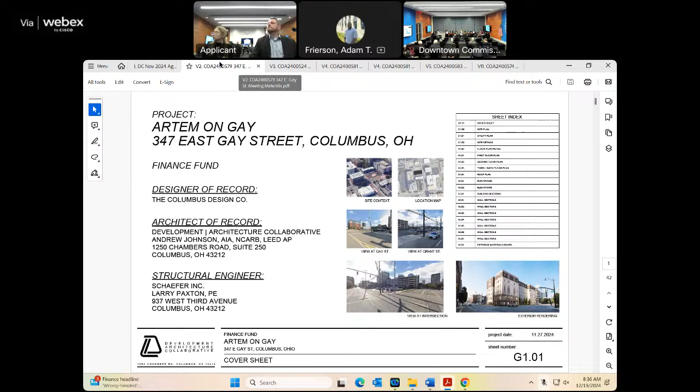The submitted materials include a site plan, utility plan, site details, floor plan, roof plan, elevations, sections, building details, renderings, material details, and material cut sheets. We can go through those materials quickly.

Just the site plan. We have some building details here, the wall types. Here is the ground floor. You see those amenity spaces here with the parking access off of Grant. Second floor plan. You can see one of the terraces here. 3rd through 6th floor. Here's the roof plan. And then we have our elevations, sections, wall sections. We have the materials board. And then we have the material cut sheets if you have any questions about the specific materials.

With that, the downtown design guidelines recommend that buildings located on a corner lot be designed to address both streets, utilize high quality materials and a higher level of design with a transparent first floor and landscaping that complements the overall development. They also state that parking structures have a high level of design to minimize their monotony, integrate other ground floor uses, and that a reduction or elimination of curb cuts is encouraged as sites are redeveloped. Based on the information provided, this project would trigger downtown streetscape standards along the Gay Street frontage. In summary, the proposal is largely consistent with the downtown design guidelines, and staff encourages the applicant to add an art mural on the west elevation.

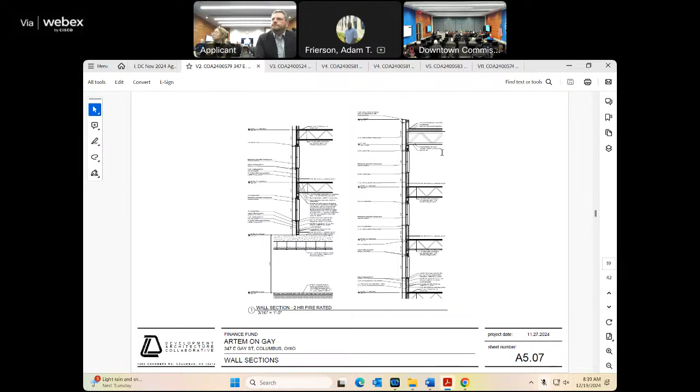So the bottom, the original, I guess the back of the building that faces an existing parking lot to the south, was going to be cast stone. What we're doing is matching what we're doing on the cast stone on the front. Previously it was a veneer, now we're going to go full depth cast stone, full depth brick. The CMU on the back will be a split face CMU that matches the cast stone, same color. So the sample you're seeing right here is the actual cast stone we'll use, and then we'll use a CMU block in the back that matches that as well.

That's first and second floors, actually. Correct. On the back side of the building, since the first floor is all concrete, we have infill walls between the concrete structure, and that infill is going to look similar to this. Once you get above the first floor podium, we transition to brick, and above the brick, we transition to horizontal siding. Around the top of the building, you have the vertical siding. So the horizontal siding is the cementitious shiplap, and at the top we have the vertical metal siding, which are both consistent. Could you show the colors?

Yeah, sample for that, please. This is the brick - obviously this is just showing it as a sample, so not full depth, but that's the brick itself. So for the metal siding, this is actually what the profile looks like. That is not the color, but that's the size of the actual siding. And then this is a sample of the actual color.

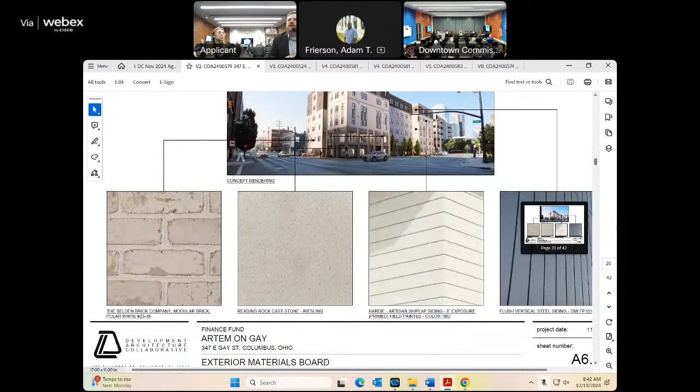I can't remember, but Forgen I believe is the manufacturer that the original architect specified. Do we have a sample of that? I feel like they may have submitted, but I don't know if we got a submittal for the actual punched windows or if we just submitted the others.

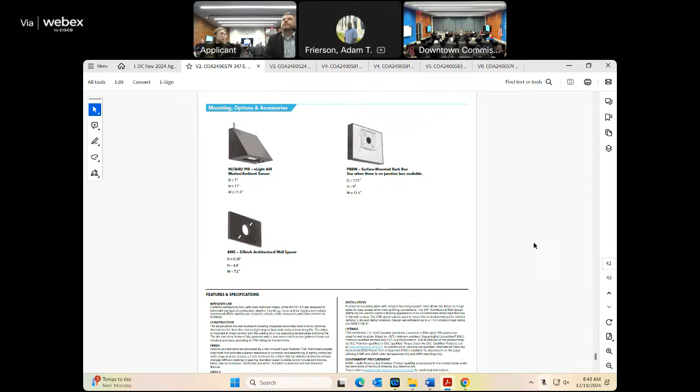Here's the railings. Are they aluminum? Are they vinyl? Yeah, I believe they are. No, sorry. Yeah, I think they're either vinyl or fiberglass. I think they were fiberglass, I believe. It should be mentioned on the section. I apologize, it's either vinyl or fiberglass.

But the look is integral muntins like that. It's a double hung window. It should call out exactly what it says on there.

What's that, smaller than before? Windows are the same size, but what we did was the previous architect had like 3 windows sort of stacked on top of each other - a small little window and then a double hung, and I believe there may have even been a third window in some locations. So we eliminated that; the manufacturer can't really stack them.

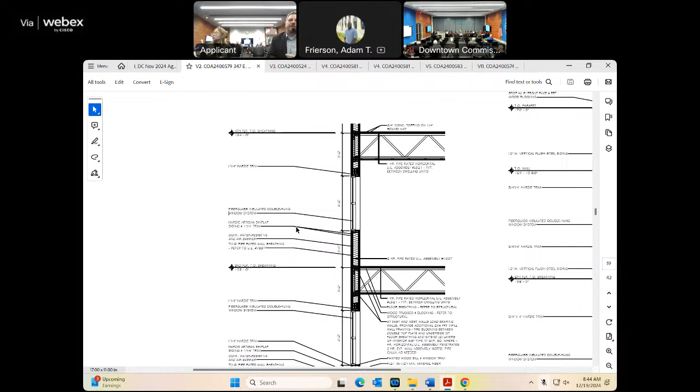They could put them horizontally next to each other, but there wasn't really a way for them to stack them. So we kept the same look, we just removed a lot of the windows. We didn't think it was absolutely necessary to have 3 windows stacked on top of each other for every residence, so in some areas we reduced those, but the overall size of the main window is the same.

So you have the same size of windows? Correct, you just have less. You eliminated panes - exactly, like transoms and the windows below the operable windows. Are they actually smaller in size, or did you just put 3 and turn it? No, so what was the middle one - there was a transom and then there was a lower one. We basically took out the two, the one on top and the one on bottom, and kept the middle.

Is the opening dimension smaller? No, not the middle - the overall middle window is the same, but you don't get 3 windows now, you get 1 and it's the size of what the previous middle window was. We didn't change that, but overall you're getting less daylight in the units because of the reduction of windows. That was really the only change.

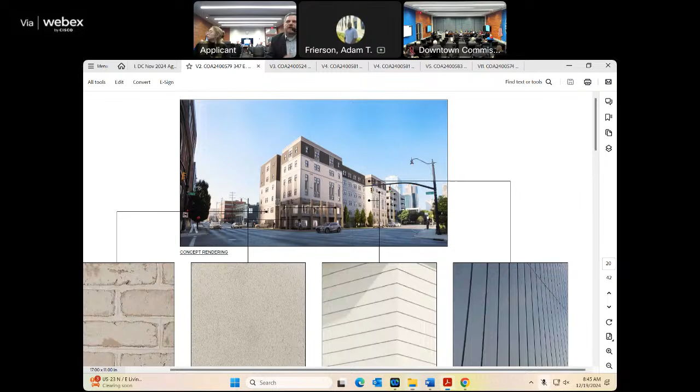So if you looked at the previous elevation and compared it to this, that's basically what we did to the windows. But we kept the same manufacturer, same style of window - we didn't change those. We just reduced the number of windows in the unit that were stacked on top of one another.

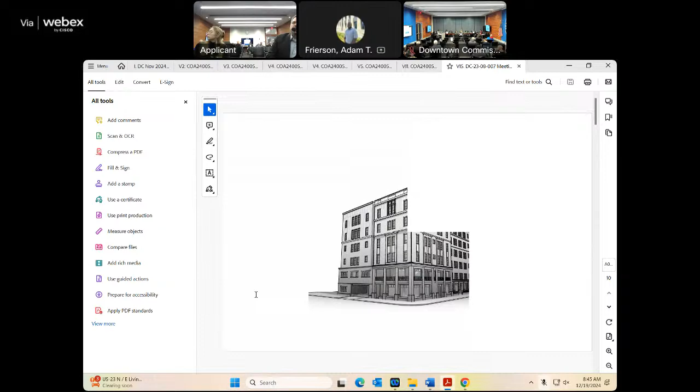Did that happen on all of the windows or just some? No, just where we had multiple windows stacked. I think originally there were 3 - oh I see, yeah, you can see. And I think on that east elevation where they had 3 windows in the middle above the garage, we reduced that to 2.

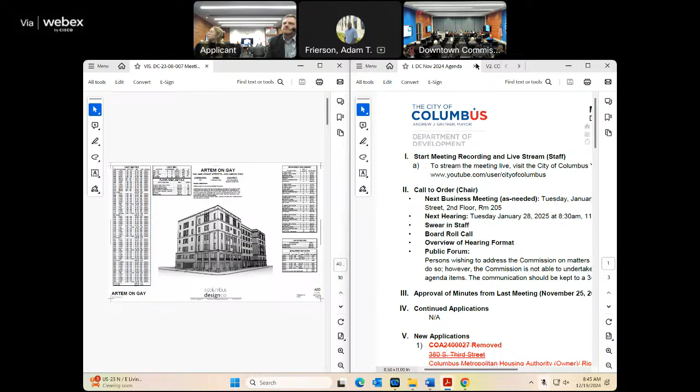Okay, walk us around the east, north, and west elevations please. Sure. On the north side, which faces Gay Street, there are some outdoor amenity spaces, plantings, and the streetscape. The civil team is working with the downtown design standards to make sure everything is in adherence, so they've designed that to meet those guidelines.

There are some plantings. Because it's a LIHTC project, the OFA funding and design guidelines require outdoor amenity spaces, and some of those have to be covered areas - up to 50% of those have to be covered, which is why you're seeing that terrace on the second floor.

On the north elevation, it actually wraps around the northeast corner - there's an outdoor terrace accessed through a community space or office space upstairs on the second floor. On the back side, we also have a terrace that's uncovered. In order to meet that requirement from OFA, we had to provide covered outdoor amenity space for people in the dwelling units or leasing the spaces in the dwelling units.

And then as we turn the corner... This was a particular feature when it was first presented. Could you speak a little bit more, not just with OFA, but to the design and how it contributes to the opportunity for this project?

Yeah, sure. So obviously the developer we're working with, Finance Fund, is requesting 9% LIHTC funding on the project. The design guidelines that OFA has in place, we work with what's required there, but we also have to meet what's required for the downtown commission. The original architect came up with the massing that you guys were comfortable with, so we're kind of working through those types of things.

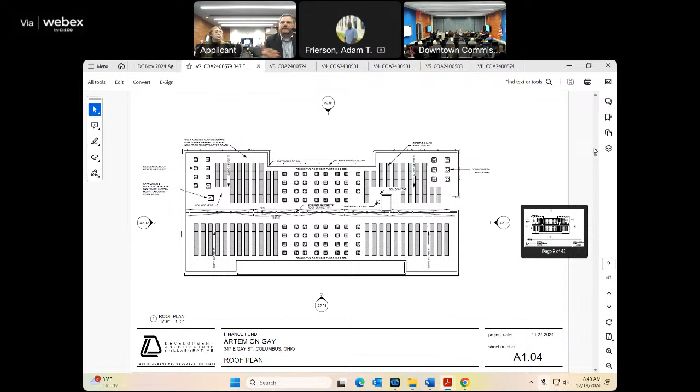We've got bike racks up front, it's walkable, there are places to pick up buses. We've got a couple of public parking spots. There's also a community space on the corner for people outside to come in and collaborate with the people in the building.

We also have the private parking. In terms of parking, the downtown area doesn't require off-street parking, so what we did was provide a van accessible parking space inside the parking garage as well as a standard parking space. Those two parking spaces meet the City of Columbus design standards, with access aisles on both sides.

When it was initially submitted, in order to provide an accessible parking space for the accessible units in the building, we provided one for each accessible unit, which was more than we really needed. So we have a total of 8 parking spaces, 2 of which meet the City of Columbus design standards. The others meet the ICC A117.1 standard, which is an 8-foot parking space and a 5-foot access aisle. Since the City of Columbus doesn't require off-street parking, we gave more than we needed.

But we couldn't reduce the number of accessible parking spaces because when it was originally submitted to OFA as part of the 20% or 30% submission, we showed 8 spaces. The owner tried to get a reduction in those accessible parking spaces, but they said no—though you could potentially designate them as tenant use during certain hours and standard parking during others. We may or may not do that; most likely we'll just label them all as accessible parking spaces as currently shown.

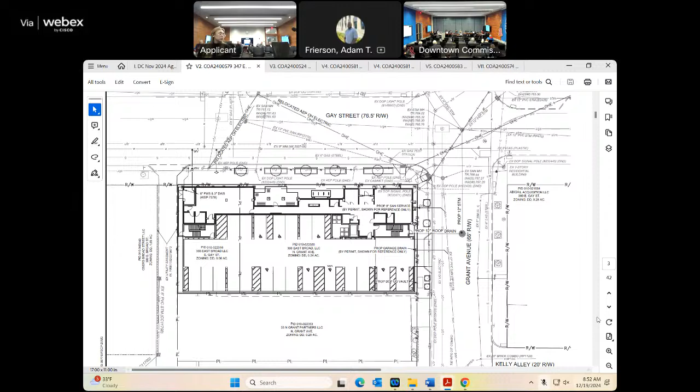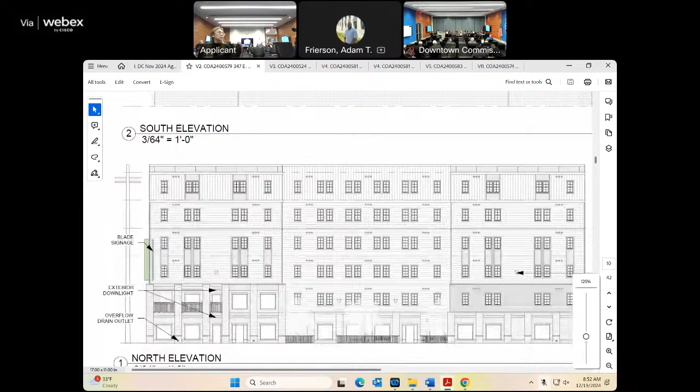So again, the north side at the bottom of the building is this cast stone here. That goes up to, I think, 30 inches. And then above that we have brick, which is this guy here, obviously full depth brick. Then you have the horizontal siding, which is the cementitious, and that's basically from the 3rd to the 4th floor. Actually, on the north elevation, it's 3rd through 5th floor.

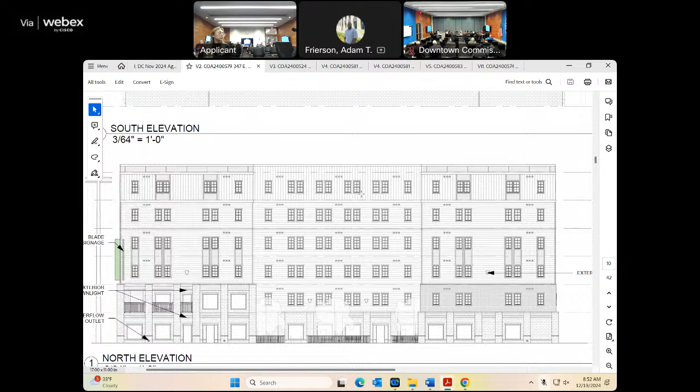And then we transition to the vertical siding, which is this product here. This is the color, this is the profile. It's a 1-foot piece, and these are repeated, obviously. Those were consistent with what the original architect did. The only changes we made were going full depth to this versus a veneer, which is a thinner material, so we had to beef up the structure to accommodate that. But the overall aesthetic for the materiality remained consistent with what it was when initially submitted. As you turn the corner towards Grant, those same materials carry around the side.

And then as we get closer to the garage, we have the split face CMU on the first floor, which are all infill walls between the concrete structure. Then we transition to brick, and again the same transitions to the horizontal siding and the vertical siding up at the top.

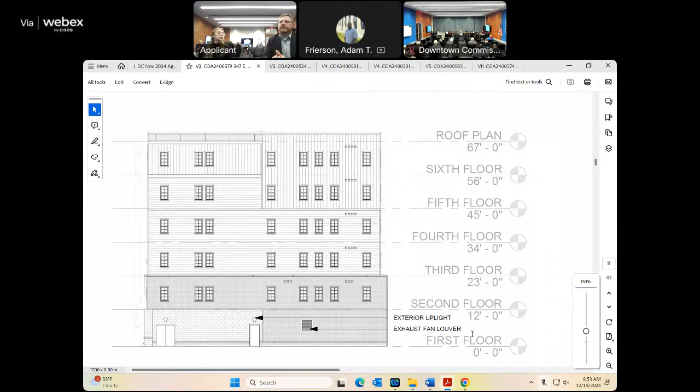The back is very consistent. Again, the east side, the upper 2 floors are vertical siding, horizontal siding from the 3rd to the 5th floor again, and then brick at the lower portions.

Brick—so the area around the entry to the garage is in brick. Is that what that is there? It is, yeah, that is brick. It only transitions to CMU, I believe, at the back side of the building where we infill between the concrete columns, right there with the column.

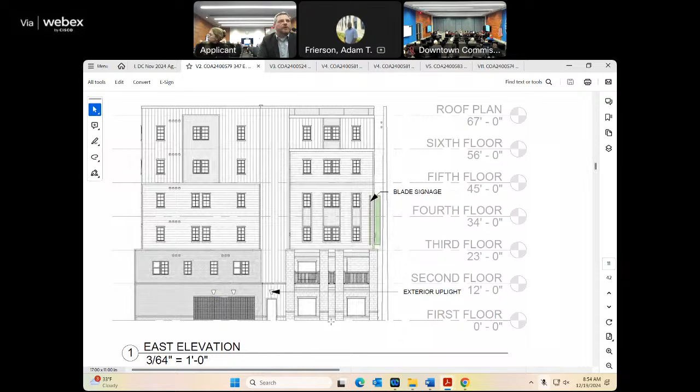That's the CMU product—no, yeah, that is actually the cast stone. So all of those column wraps, all of the pilasters, things like that, are all going to be the cast stone, so it'll be a little bit bigger module, closer to 8x16 than a standard brick size.

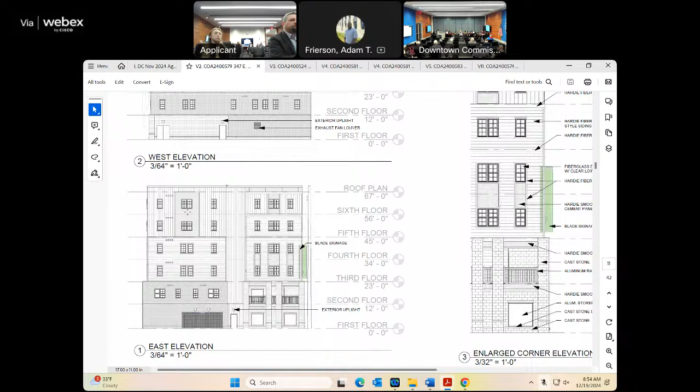I'm sorry, I'm not trying to monopolize. Any other questions? Yeah, what's the material around the windows on the upper floor? Cementitious trim, so it would be the same sort of Hardie panel. They make a dimensional, like a 1x4 primed material that's cementitious, and then it just gets painted.

Out into, there's a door space with windows in it—this area. Yeah, oh, that's all the cementitious panel, this stuff right here, so you can kind of see the joints in it. It comes in like a 4x8 sheet or a 5x10 sheet, and it's basically cut to whatever dimensions we need. Then there are trim profiles you can put in between it that give it a reveal that looks nice. So the mass of the wall is the metal paneling, and inside these rectangular areas, that's the...

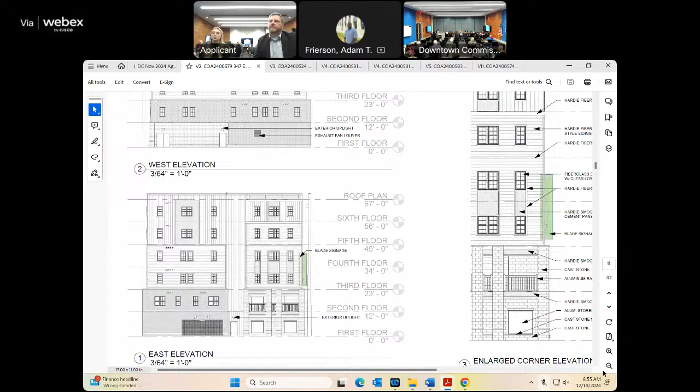You got it, yeah, and then it's trimmed out with cementitious trim like that. You got it. Jim, since we're looking at that elevation, it looks like on portions of the east elevation and some of the other elevations, you bring down the vertical metal siding 2 levels instead of the 1 that you have. I was just wondering if you could explain that design.

Yeah, since we knew there was an initial approval, the initial design submitted by the previous architect was sort of consistent, we didn't change a lot of that massing or the materiality. So we didn't really say let's bring down 2 stories here—it's really consistent with what the original architect did. Like I said, we made some changes to the windows and some other minor changes, but in terms of how far we're bringing materials down, that remained consistent.

I don't know why he originally had it bringing down 2 stories at the back. I mean, we could make some changes to that if you guys feel that would be a more positive change to the building. As we kind of step down towards the back of the building, we make a little bit of transitional changes just for interest as you're transitioning to an area that's sort of facing the parking lot. Maybe that's why they did it.

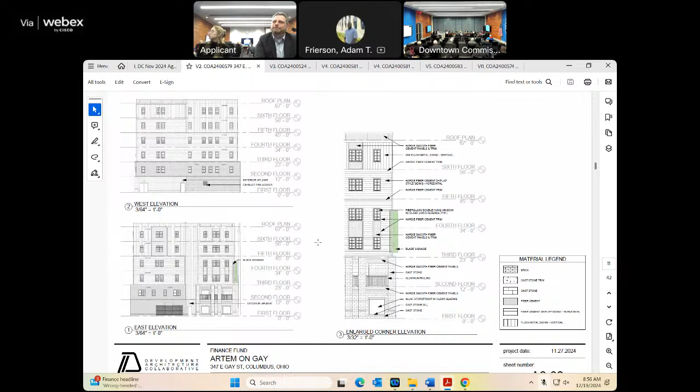Can we see that south elevation again? When you say the back, you mean the south? Yeah, the south one that faces an existing parking lot that will remain, correct.

I think you've given up something here by having all these windows exactly the same. I think it had that little bit of modulation in there on some of those, even if they're not three sections, eliminating three sections. I get that. But I'm wondering if there was an opportunity to lower at least maybe the double ones or something like this so it gives it a little more energy. Yeah, we could go back and take a look at where there were stacked units and potentially put some of those back in.

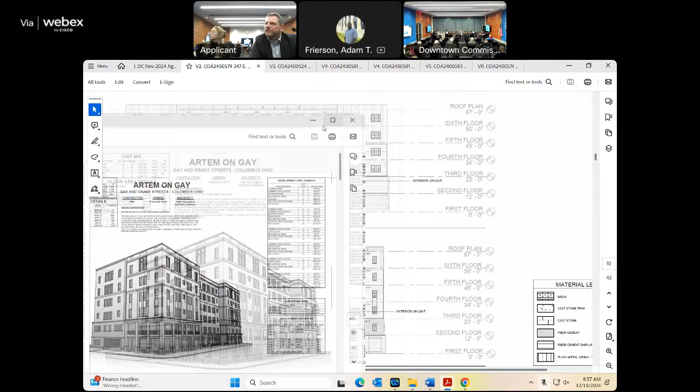So the initial rendering should show it. I think you're seeing some of them up at the top of the building there. You can kind of see it on that east elevation, where there's three windows stacked on top of one another. Those are the kinds of changes that I was talking about.

And I'm not sure that you would need all of that. It seemed like a lot of windows in one unit. That's kind of why we reduced it. If you had a window like this and then next to it a window like this - a little bit bigger window, like a single unit - which means lower, probably. You don't want it.

But maybe just something that's a different size. Three sizes to one. I think you would get something out of that. Yeah, we could take a look at that.

Absolutely. Circling on the 6-story building, that shiplap siding - is it like a residential scale material? I mean, they have different sizes. I believe the one that he picked was a 9-inch reveal. That was, again, the original designer's intent was to use a shiplap type siding. It is residential, a lot of times it's used on residential buildings, but it gives you a little bit of interest. There are other siding type options, but doing something cementitious is going to be the most low maintenance for the future. So I think that's kind of why he selected that.

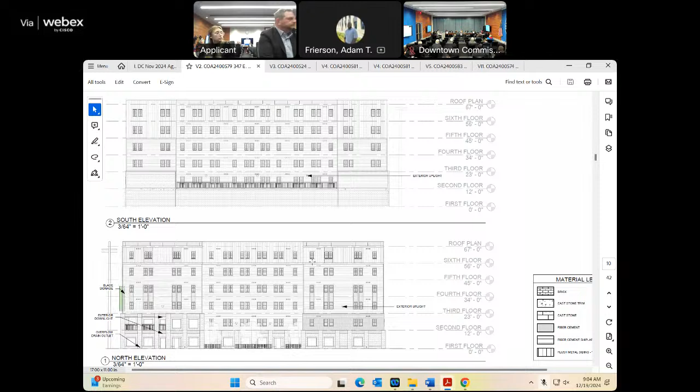Yeah, I agree. I think the big thing for me - obviously the windows are huge - the other thing for me was the railings. They all seem like they have that very commercial sort of feeling to them, institutional almost. So I think having more of a residential type of railing, maybe with lighter elements, something that sort of lightens that up and doesn't make it feel so institutional.

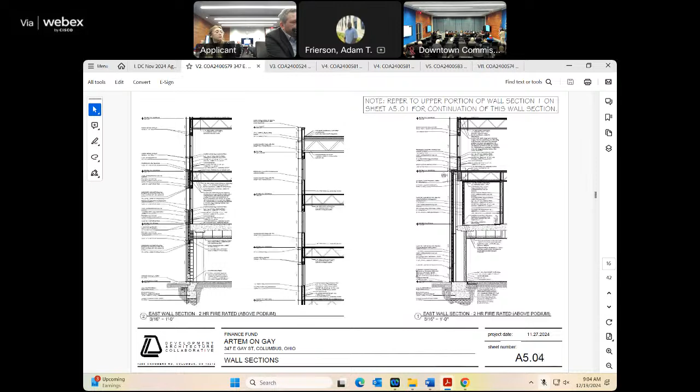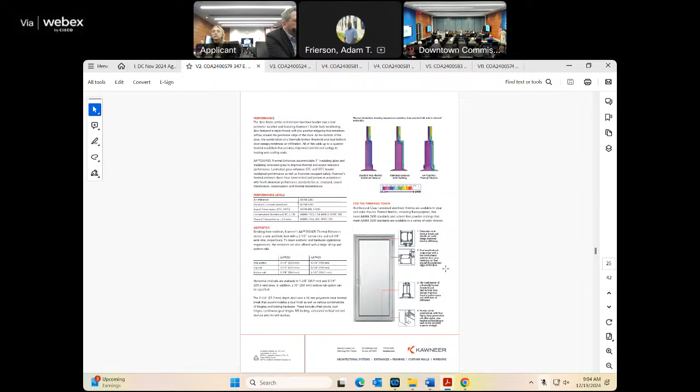Sure. Where is everybody on this thing? Let's almost view this a little bit as conceptual and say, what would we like to see? Because I think what we want to do, to the extent that we can, is - I know you guys in the large sense have been working on this for quite a while - so where's everybody on this?

I think we're talking about some of these detail tweaks. I think it's a great project that just needs a little more finesse, without blowing the budget.

Obviously we're working with the developer here and we get VE requests, but we're trying to do the best we can to make sure we're meeting the guidelines and all that. So I'll work with them and say, look, we've got to make some of these tweaks, we're not going to get approved if we don't. We'll do the best we can, resubmit it, make those changes, send it back to you guys and get back on the agenda.

I'm kind of looking at your elevation drawings here too, and there's some dark patches in there, like around the base and at the top. I think that's good. We discussed the palette, and it's real light. I think if some of these elements are a little darker, to me it just adds a little kind of mass to the thing.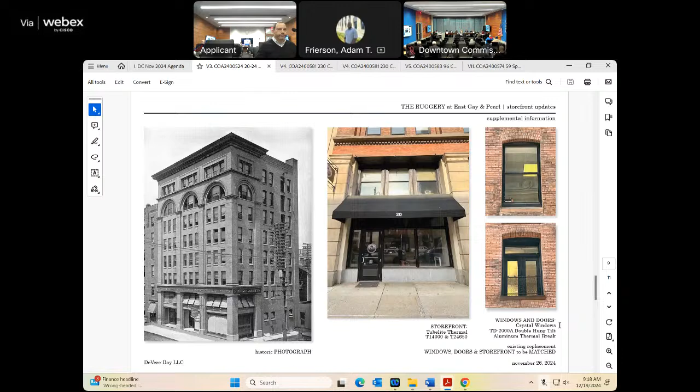This is located at the corner of Cleveland Avenue and Spring Street on what is currently a surface parking lot of the Columbus State Community College campus. The applicant is seeking commission approval to construct a new 80,000 square foot health sciences building situated on a portion of the current parking lot. The site includes landscaping and outdoor seating areas, and exterior materials include metal panels, base brick, and curtain wall. Submitted materials today include existing condition site plan and photos, site plans, parking lot, pole lighting details, landscape plan, floor plans, roof plan, elevations, renderings, section, building details, and material cut sheets.

The downtown design guidelines state that downtown's built environment should continue to be enhanced and energized with new buildings and additions to existing structures that promote good design, long-lasting building construction and materials, and attention to detail, especially at the street level. The guidelines recommend that new construction be influenced by the pattern of nearby contributing buildings. They also recommend high-quality materials, ground floor transparency, lighting that minimizes uplighting, and the inclusion of landscaping and plaza space. The proposal is consistent with the downtown design guidelines.

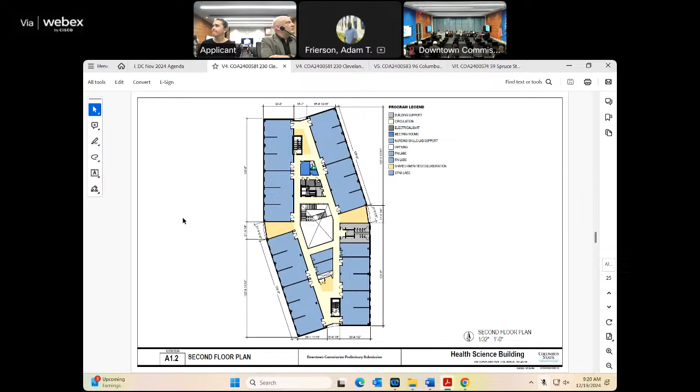Some rendering imagery. We have the landscaping plan, and here's the planning diagram for the building. Architectural site plan, and then we get into the floor plans for the building: the first floor, second floor, third floor, and then the roof plan was provided as well.

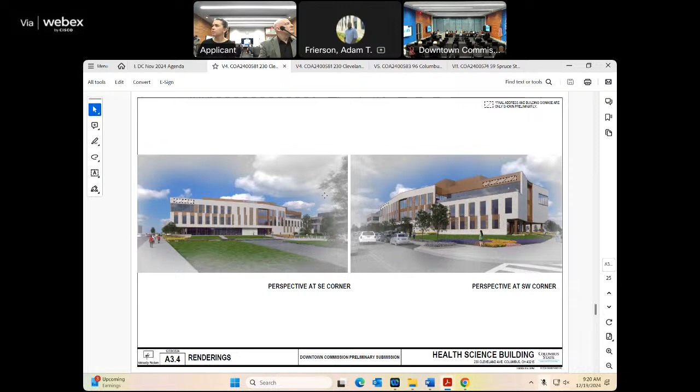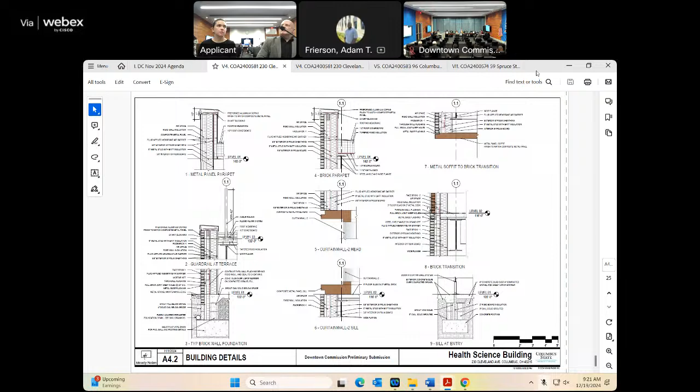And then we have the elevations: this is the east elevation, north, south, west, and perspectives. And then we have our building sections and the details, and then I also have the two here behind the scene. We have the cut sheets for the materials there for quoting.

We can go through these in detail if you have any specific questions for our applicant. And with that, that is all I have.

Okay, Mr. Chairman. Yes. I'll recuse. Okay, good, I was just going to ask you. We'll miss you, but that's fine.

And by the way, this case is for approval today. We have not seen it before, but it is for approval. Could you identify yourselves for the record, please?

Sure, I'm Hannah Awari, project architect of Moody Nolan. I'm Brian Sell, project designer with Moody Nolan. Great, could you raise your right hands? You swear and affirm that the testimony you're about to give is the truth, the whole truth, and nothing but the truth? I do. I do. Thank you very much.

Is anybody here from the owner then, by the way? Yes, sir. Okay, great, thank you. Let's go ahead, we have not seen this. You're here for approval. And so let's walk through it. We got a lot of stuff to kind of look at, I guess. I'll let you guys go ahead and take it from here.

Please. Sure, and yes, you're correct, this is the first time, so we wanted to give you an introduction to this project and the back history to it. So this building is a response to the shortage and demand within the Columbus network for healthcare professionals.

This building directly is a health science building on the Columbus State Community College campus. As you saw in the drawings, this is on the corner of Spring and Cleveland, right in the southwest corner of the campus. It's directly south of Mitchell Hall, so it'll have a connection back to Mitchell Hall as well. It's an existing parking lot that'll sit right there on the corner of the street.

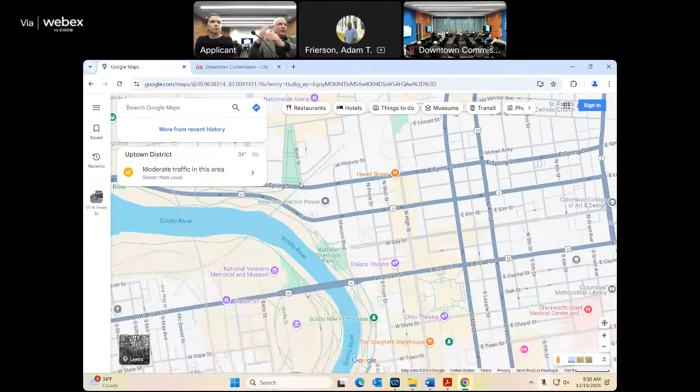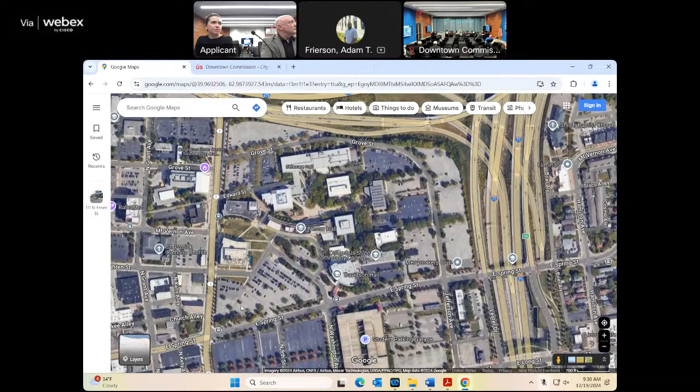The most important geometry is in that middle diagram, where we wanted to allow an atrium inside the building, opening up the interior. But this new geometry relates to Spring Street — the future development of buildings will orient themselves to Spring Street. So that's what's missing, the future possible buildings that start to align with that, and the different movements are also responding to that campus connection. It's tilted in a way to relate to the other nursing programs, and the connection back to this new building responds to Spring Street to the south, and aligns to Mitchell Hall to the west along Cleveland.

I'm wondering, when I look at the campus, you were talking about integrating everything. Is there an attempt to fit in with some of the other architecture that's there now? We've got the older stuff north of, I think it's Mount Vernon Avenue, and then you've got Mitchell Hall. But this is kind of a different kind of thing. Are you doing that consciously? Is that part of what you're trying to get to, that each of these is a different building and feels different, looks different, or is there some thought out there to do it again?

Maybe I'm not seeing it. There's been discussions about this being sort of a gateway corner. We know this is heavy pedestrian but also heavy commuter connection, so making intentional moves for those coming as a commuter, parking and entering the site, but also how does that sit as a gateway for the campus on that southwest corner?

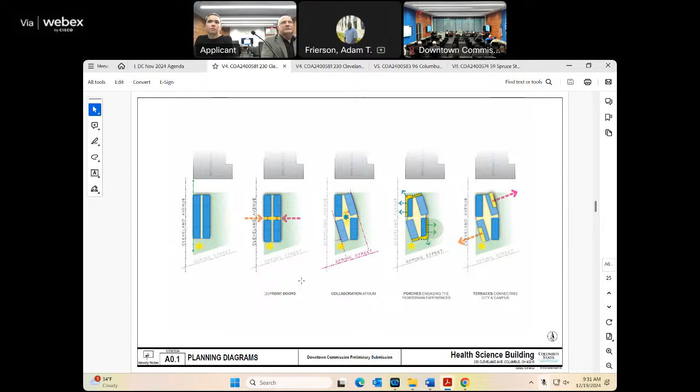Well, is the idea then that newer buildings going on would be kind of, would fit in with this more? You see what I'm saying? I look at this building and I look at that, well, they don't necessarily... We don't need to do copies, but it's some kind of relation, it sounds like that might be it.

You talked about a master plan for the campus. Has that ever been presented relative to this building and to Mitchell Hall? Because I think that would be helpful to understand.

We have, but it's been some time. We now have a new economic director in that area, Zach Woodruff, who came from Whitehall. So the owner is here today. Is there something they could tell us that would assist us in understanding the complementary aspects of Mitchell Hall and this building, as well as what the future is?

Because Columbus State has a lot of parking lots, and we're all in favor. Would you like to join us? I'd be happy to. Sure, thank you. Thanks, yeah, bring it, Sharon.

Can I ask you to identify yourself for the record, please? Kieran Sherry, Executive Director of Planning, Design, and Construction for Columbus State. Can you raise your right hand? You swear to affirm the testimony you're about to give is the truth, the whole truth, and nothing but the truth? I do. Thank you very much. Okay, I'll be happy to address your question if I may.

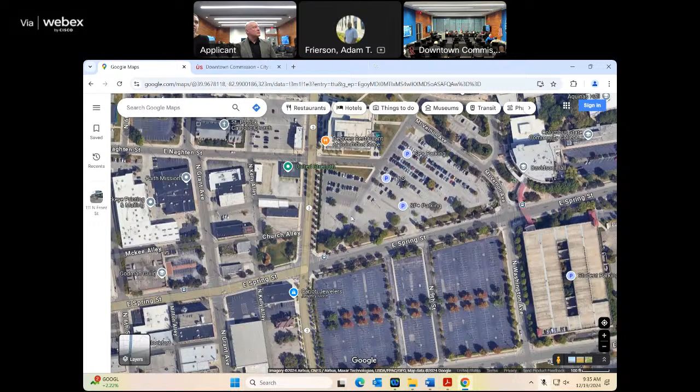Candidly, most of them are not going to be directly for Columbus State, but they are going to be addressing parking lots. You may be aware of the proposed WODA development specified for Spring Street. There's also a lot of conversation about what might happen in the future across the street, south of Spring Street, a multi-use development that would absorb that significant parking spot, and would likely include a building for servicing Columbus State, amongst many other items.

But this hard corner where this building will sit is still going to be the pivotal entry point to campus, and so the palette is intentional to be lighter, brighter, and create a beacon at that corner. Over the next number of years, many of those surrounding parking lots west of Cleveland, south of Spring, will start to get redeveloped for multi-use purposes, and less parking will exist into the future. So I hope that helps put some context to it.

I'll add too that this building is specifically for health sciences. The rest of health sciences happens in Union Hall, which is diagonally past Mitchell Hall. So that diagonal line of traffic across campus to Union Hall is particularly important. All of the faculty that will teach future students in this building will still office in Union Hall, so there's going to be a huge amount of diagonal traffic across campus for folks coming to this building.

I'll also add that we purposely put general classrooms on the third floor of this building. The idea is we want not only health sciences students in this building, we want other students on campus to come and experience the building and get excited about health sciences careers, and potentially change their majors by the experience that happens in this building. So that diagonal artery back to the heart of campus, what we affectionately call the oval, is a critical alignment piece for this building. I hope that helps.

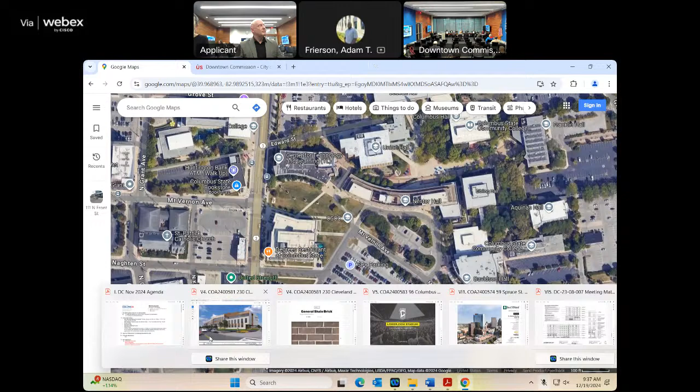Do you have an updated plan for the campus? We discussed the whole thing here, that obviously the surface parking lots that everybody knew and understood were going to go away over time, which is wonderful. But have you updated a plan, or do you have one? Maybe you're going one at a time.

Yeah, I would say it's more one at a time and it's in process, as opportunities come up. But the broader direction is that most of the academic activities for Columbus State are going to be migrating east of Cleveland Avenue, and there will be significant future developments west of Cleveland Avenue and south of Spring Street. That's kind of the macro direction the college wants, not solely for Columbus State use, but other creative uses, so that many of those parking lots and others are doing this around us as well. Indeed, one of the projects earlier was pretty close, but I think that's what's happening in that general area over time.

Do you have a thought or scheme for when—I understand we've looked at these buildings running down the line, as long as we've been doing this since the downtown commission has been here, and you've looked at a number of these, including your library bookstore and even Nestor Hall. But is there any thought about trying to make the buildings look coordinated, like a campus, where they're somewhat coordinated—maybe you're trying to do that on this one? Because I think you might get something out of that. I'm not saying a cookie cutter approach, because I wouldn't want that either, but I'm wondering if you've given thought to that.

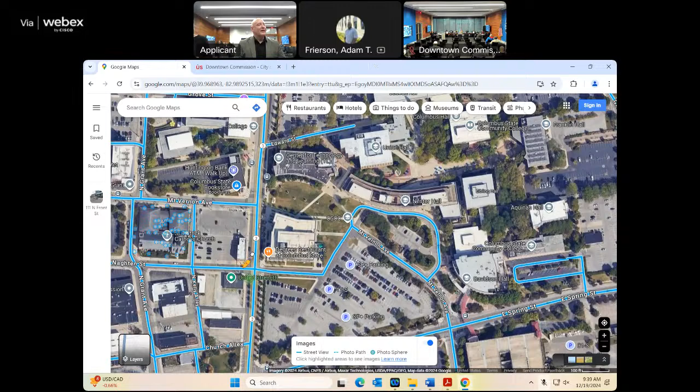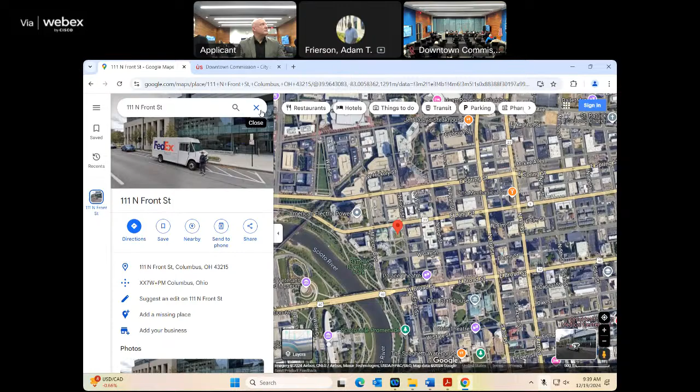So we have a lot of conversations around paths of travel, the intuitive activity of a student—how do they know how to get from one place to the other. But I don't think we have the appetite to reskin the buildings so they all start to look equivalent. I think we can do a lot of work with that as you proceed, since you're going to be doing more buildings, I would assume. We're going to be doing a lot more renovations of existing buildings. I don't anticipate beyond this one, and potentially one south of Spring, a whole lot of new construction.

What I am anticipating is a lot of renovation of existing space, and then with third parties, redevelopment of some of the parking lots and other occupancies west of Cleveland, south of Spring.

I guess this question is going to be unfair, because I'll go to Ohio State. Our master planning, particularly when we go through framework 1, 2, and 3, it's not concrete as far as what it's going to be, but there are ideas of what it can be.

When you think about Columbus State and the connectivity 2-year, 4-year, 2+2, and look at what are some of the emerging businesses you're training individuals to obtain certifications in - you think about what's happening with the chip industry, batteries, automotive, logistics. I'm asking because I see a campus and I'm thinking, when you're looking at your master plan, are you looking at it according to what are the opportunities, particularly from a workforce development standpoint, and increasing your student population in different strategic areas or buildings?

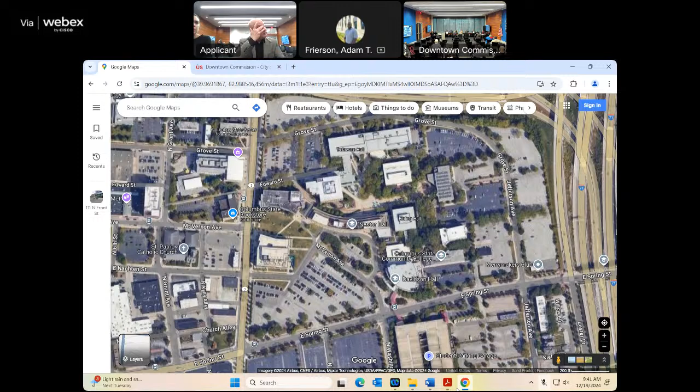So I'll offer a couple of comments. You are correct, we are not like OSU - the worlds are just totally different in terms of scale, size, scope, and opportunity. But I'd offer this building proposal is directly in response to what I think Columbus State is really good at, and that is anticipating what the workforce needs are in Central Ohio.

We're trying to double the output of our health sciences graduates into the future. You mentioned automotive - we're in the process of working on a project to double our automotive capacity on campus without building a new building. We're talking about advanced technology, and we've done several renovations to expand our engineering technology capabilities within existing buildings on campus. New opportunities and new workforce needs don't necessarily have to beget new buildings. This is a good example of where it does, but there's a lot of other work going on campus to allow us to put more throughput into those programs needed to grow the workforce in growing areas in the economy.

Okay, go ahead. What I'd like you to do at some point is walk through the rest of the materials we need - show us the brick, show us what the windows are, what it looks like - metal panels, show us what those are, and explain the design.

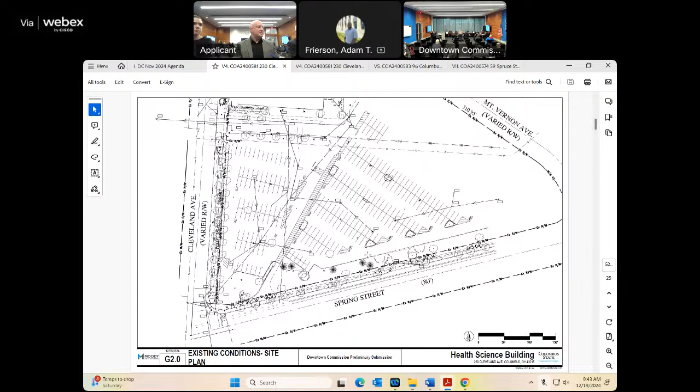Love to. I'll let everybody ask questions here in just a second, but to carry on - architecturally, this is really driven from a study of Mitchell Hall and its success. Like Mitchell Hall, we have punched openings, all brick building, two-tone brick, a field brick and an accent brick. Those accents revolve around the windows. In Mitchell Hall, it's floor-to-ceiling window openings with an accent brick.

Unlike Mitchell Hall, we have floor-to-ceiling windows, but they're in a very regularized pattern because of our simulation labs, so a little more structured fenestration. We want this 1-inch offset in the brick, so a shadow line and a contrast, and we did many studies.

One thing we emulate from Mitchell Hall is that accent brick - there's another material used in Mitchell Hall, which is metal. So anytime we push in or carve into the building with the porches or terraces you see, those outside spaces are critically important to this program and to the student collaboration spaces that happen inside. That becomes metal, but unlike Mitchell Hall, we went with a warmer metal finish.

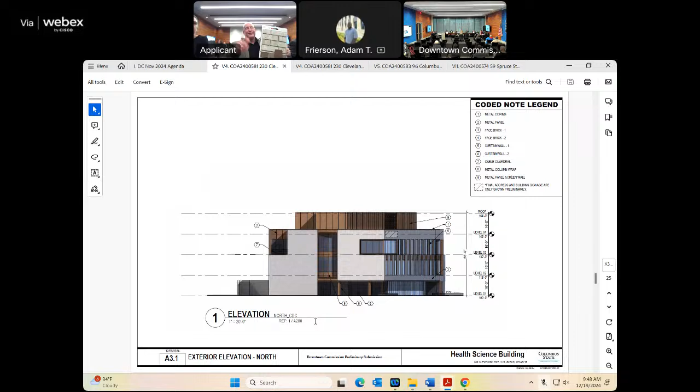I had a similar concern, because right where you have the major entry, there's a very large overhang, and then there's an overhang going across to the traveling line. I'm just not sure what it's going to read as - if it's going to look dark and cavernous, or if there are strategies with lighting or other techniques, or with the glazing you choose, to make this look more accessible. Because you're saying this will be a very beautiful iconic building, and you want people to come in, even people who might not have classes, who want to explore what's there. That entry point needs to seem really accessible. It's something to think about - whether this rendering depicts what it would actually look like, or if there are strategies to make a more prominent entry without compromising your design and concept.

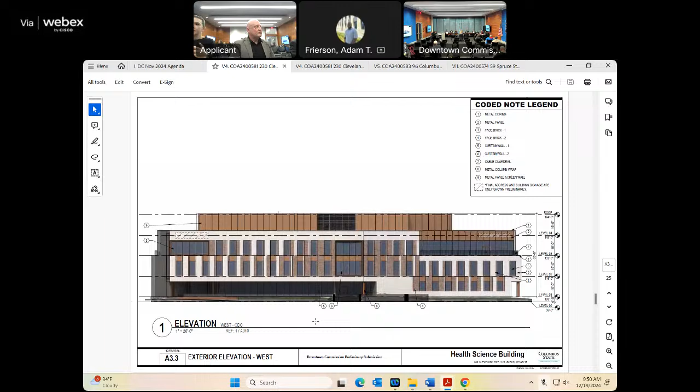I think a key part of that too is the landscape connection - there are ramps and stairs bringing you to the lighting you were mentioning. You have the monumental stair, and maybe there's a way to beautifully light that.

Be dramatic. Into the building.

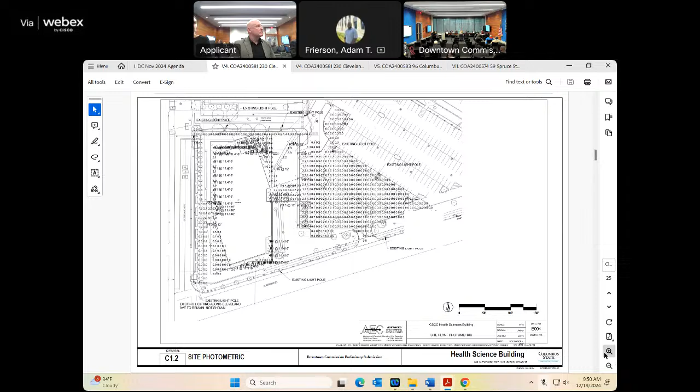Have you submitted a lighting plan as well, and this is your landscape plan? Yes, there's a photometric plan too, covering the parking lot. We're utilizing existing pole lights to the west and south, and the pole light submitted in this packet is for the pedestrian pieces on this plan. All cuts into the building for those overhangs will be lighted as well. There are no sconces or anything on the exterior of the building, keeping that clean.

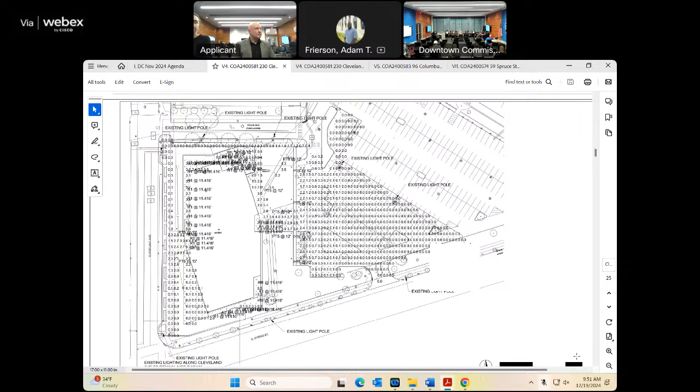Any questions for the applicant? Any comments from anybody?

I have another comment about the landscaping, I guess at the southwest corner. It looks like you have perennials there, beautiful colorful flowers, and I'm wondering how that would look in the winter months, because this is a very prominent building at a very prominent corner intersection. Finding that edge in a way that looks good all year round is important. It looks beautiful in the rendering, but other times of year, will it look unkempt? Will it just be brown? What will it be? Feels like a suburban answer for the corner.

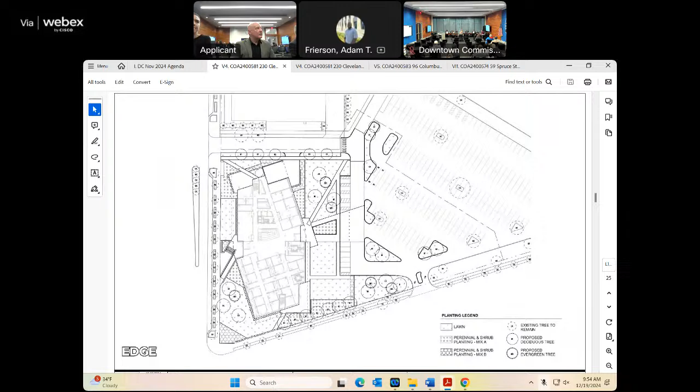The first floor is smaller than the second floor, and that came about as a programming decision because we want to get all of the nursing functionality on one floor. The best way to do that was on the second floor, which created two opportunities for the design: porches on the first floor, but also terraces on the third floor. That was a key driver from a functional perspective. But the second floor lines up with the Mitchell frontage on the west side. Can we go to the perspective? It's just hard to see.

Okay, well, where are we today? What's the pleasure? We have a request for approvals that people want. What are we going to do?

I still like to see better how it fits into the campus, we're still looking. And I feel the same way. I feel like we were saying this is really the last major building you'll be building on campus for a while, and it seems very important in terms of how it's going to engage the campus and the urban streets. Although I like the building very much, I would love to see it in its context, because I feel I'm making comments or looking at it or potentially improving it without really understanding what these things look like, and not seeing them clearly. So that's my feeling about it. I feel like I don't have all the information to comment effectively, to make comments that really are meaningful, or to make a decision that's meaningful, because I don't have the building with me in context.

Motion to continue. Okay, there is a motion. Is there a second for that?

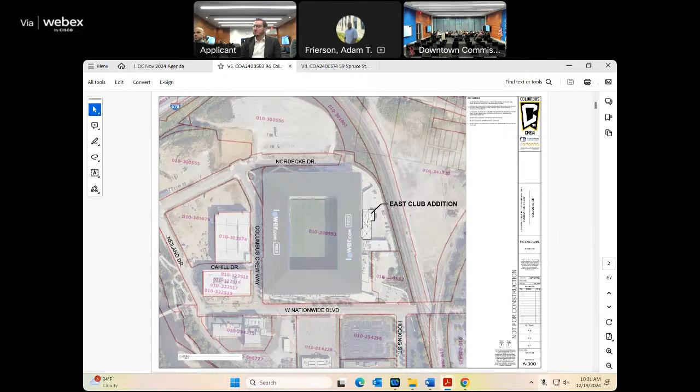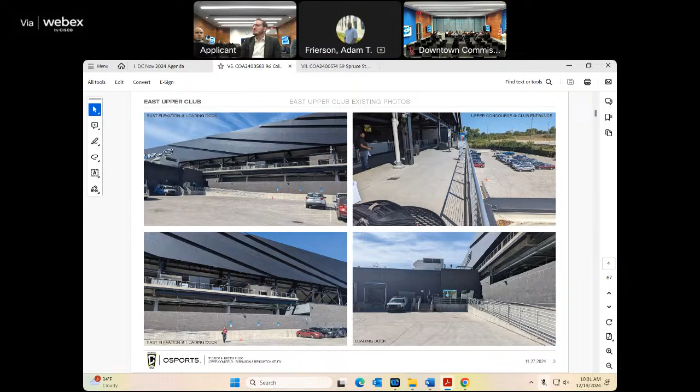This is showing where the East Club addition will be. Then you can see here, this is the section where the upper terraces will be expanded. This is existing condition photos. This is that loading dock area. This is the terrace area.

Starting with the upper club expansion, again, that's here, above the loading dock parking area. This is the floor plan of that space and how it connects to the existing building. We provided elevations for this space as well as the material palette, and sections.

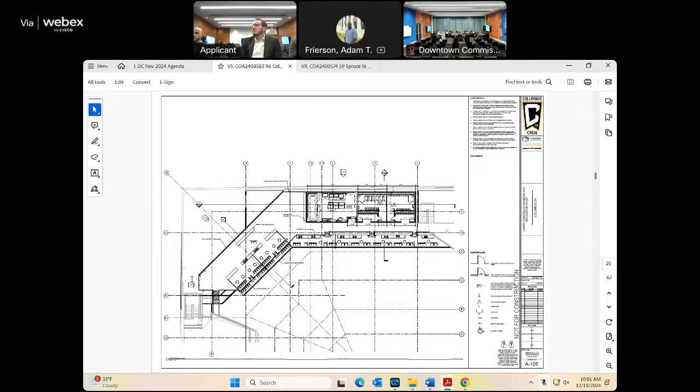Sections. And here are the renderings of this space once completed.

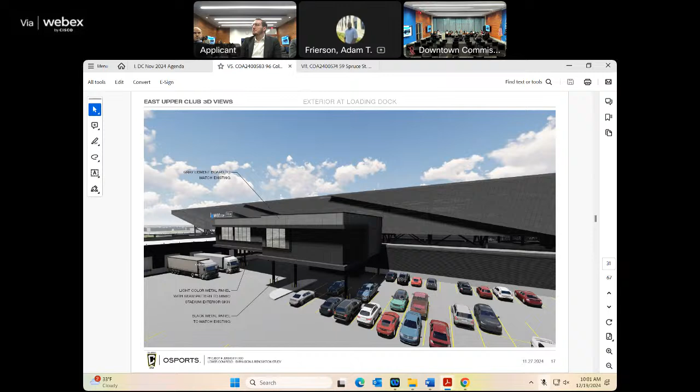And here is the materials for the upper and lower terrace expansion. Again, that is here. You can see the space is being added.

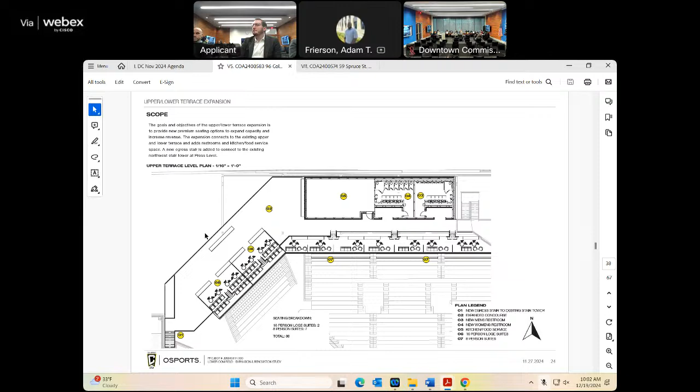Materials, and your building sections for this portion as well. It's probably showing up a little dark on the computer screen, but you should be able to see it on your Kindles. This is the existing, and this is how that space will be infilled with the terrace expansions. The renderings, and then we have details of the materials if you have any specific questions for me.

Great, very good. Would you identify yourselves for the record?

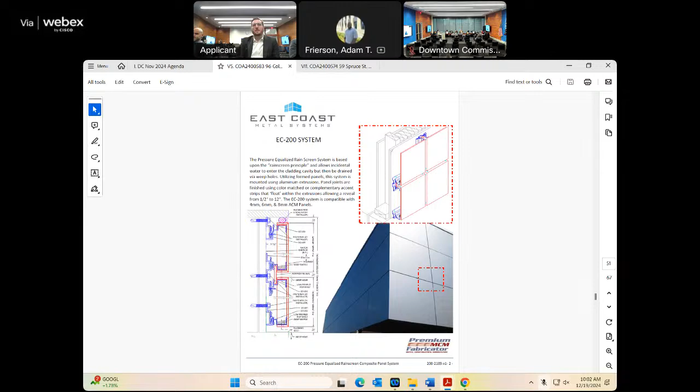Phil Dangerfield, representing Haslam Sports Group and the crew. Kevin Kramer, project architect for OSports. Jason Rodebeck, Independence Construction. Would you raise your right hands? Do you swear or affirm the testimony you're about to give is the truth, the whole truth, and nothing but the truth? I do. I do. Thank you very much.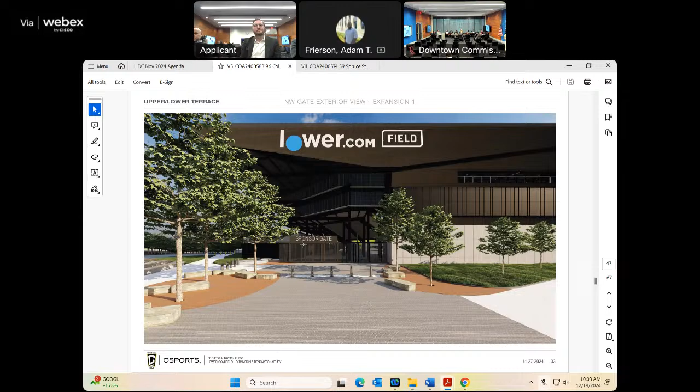Why don't you walk us through this? It seems fairly straightforward. Just catch us up real quick, and then if anybody has a question, we'll ask some. So, thanks.

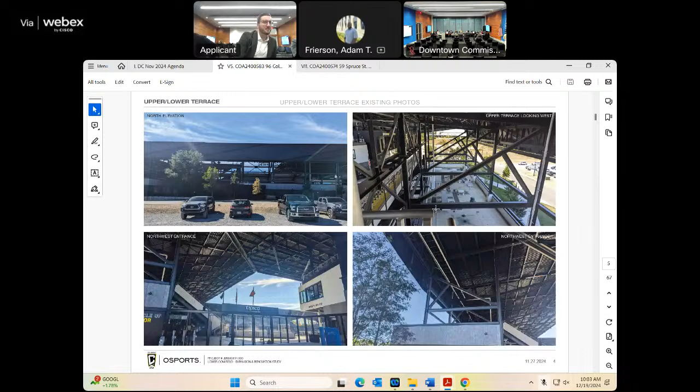Yeah, it's exciting to be back in front of you guys after just opening the building in 2021. Since that time, the building's been recognized locally and nationally, architecturally, and as a premier sports venue in the US. I think a couple things with the projects we're looking at today.

One is they really are in response to demand we're seeing from our fans in terms of fan amenities. Two, it was core to selecting these projects to maintain the design intent of the building, and I think we've done that. So with that, I'll let these guys speak and present the project, but thank you for hearing our case.

Sure, thanks Phil. So again, it's two different portions of the building, one on the exterior and one on the interior. The East Club addition is more the prominent addition from the exterior. We really tried to keep this separated, and really value and respect the intention of the original building.

With that exterior skin, the intention was not to try to touch it or alter it in any way, but respectfully place this addition in a way that is appropriate for those upper concourse centerline seats that would be using this club space, as well as materials, and really the respect of the building.

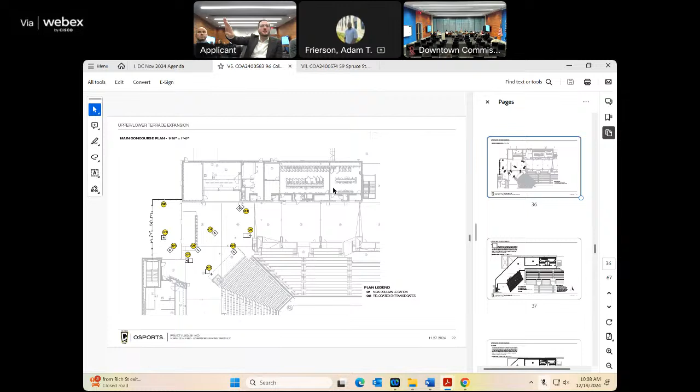It is a big design concern for us, and on this plan, the one we submitted last month, we've since removed 3 of those columns, so it's a clearer space. There's a bar that sits up against the backside of that lower bowl seating area, so those columns will actually be built into the bar space, so they won't interfere with traffic. We've analyzed that there's columns that run down the middle of the concourses on both sides, so there's a balance we were playing with about where those go. We're able to look at it and eliminate some, integrate some into the bars.

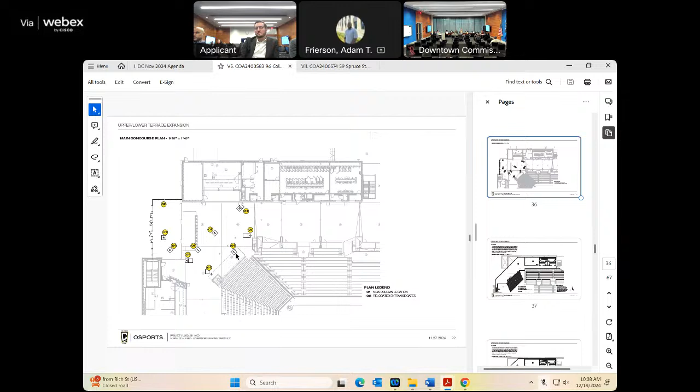Other questions? Comments? Anything from the audience? We have a motion to approve. Is there a second, please? Second. Okay, any other questions or comments? All those in favor say aye. Aye. Those opposed? Motion carries.

Great facility. Yeah, that's my. Thank you. Good to see you.

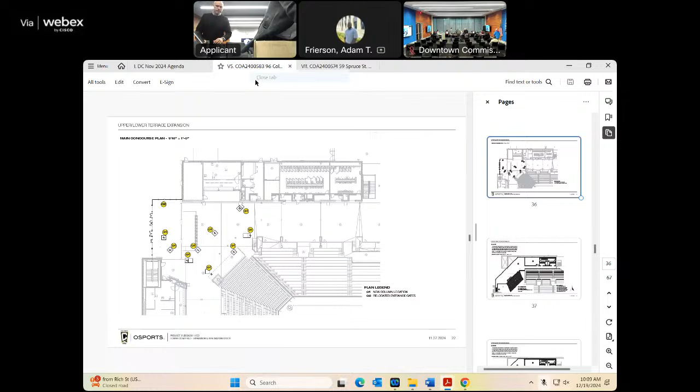Okay, go ahead, let's do this. Okay. Our last application is COA 24-00574 for 59 Spruce Street.

This is located on the block bounded by Spruce Street, North Wall Street, and Vine Street, directly east of the existing North Market. The applicant is seeking conceptual feedback from the commission to install 2 LED illuminated roof signs on the building's north and south elevations respectively. The signs will measure approximately 53 foot wide by 26 foot tall and be mounted to steel framing, which will be attached to the elevator overrun at the top of the tower above the roof line. The application is also within the North Market Historic District and is under concurrent review by the Historic Resources Commission.

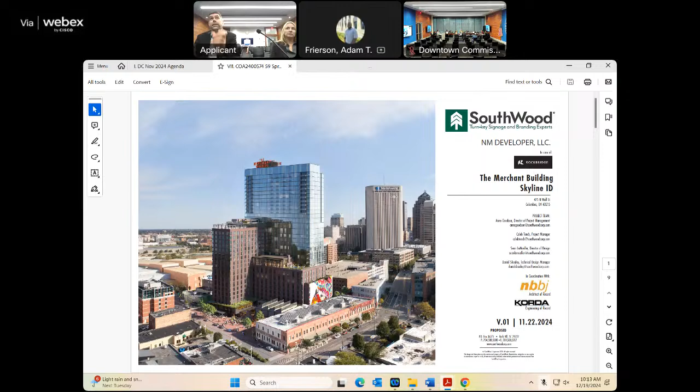The opportunity that we see here with the building, going along with the guidelines for downtown, is the ability to identify the project with signage on the rooftop. The concept around this was really more of a historic approach. It's an LED sign, but it's designed to look like neon, tying back to that old school signage. We looked at the dispatch sign, and then looked at the scale of signs around Columbus just to see how it fits in. Each of the letters - the word 'the' and 'building' being 8-foot, 7-foot letters, and then 9-foot letters for the merchant in the middle.

That fits with most of the rest of the signage that's in and around that you would see around town. The new Hilton sign and others are very similar in size and scale. Fits well at the top of the tower.

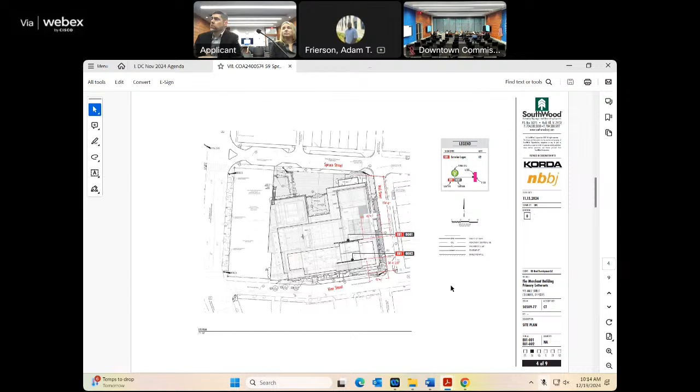Correct. That would be all you would be doing on top of the. That is correct. When you look at this, it looks like the letters are outlined in black there. Is that the way that would be, or is that just?

So there's a frame, basically a 6-inch frame. The red is set back about 2 inches, and then the LED is inside of that. So there is a slight frame that goes around it. Shouldn't be too perceivable, but it will help contain that sense of the letters.

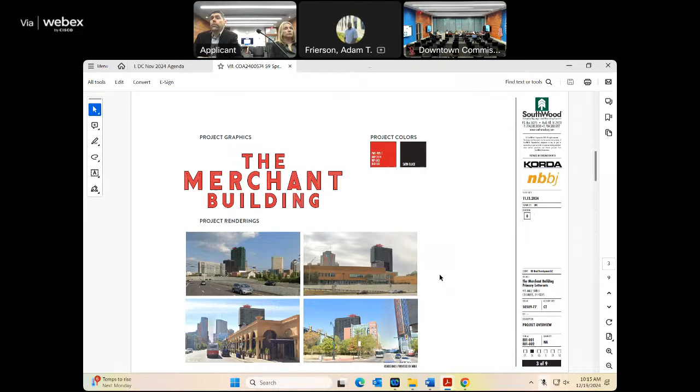Do you modulate the light intensity during the day? Is it lighter at night, or is it less? Off during the day pretty much, and then when we come to nighttime, we'll have the ability, given the LED, to modulate the intensity of it. That's the nice thing with the technologies today. So it does give us that control.

Any questions, comments? At first glance, the sign seems huge, but it's on top of a very tall building. And the fact that it's not on the building, but on an elevator tower, really helps a lot. Yeah, and I think it makes the scale of it seem okay. I'm usually the first one that thinks signs are too big. I agree with that.

I was wondering too, the black frame that's behind it, is there intention that you want that to show? Because that again is old school, very industrial looking. I can't think of the word, but something that looks kind of industrial and old school. And the elevator tower behind that, is that also the same color or a little different color?

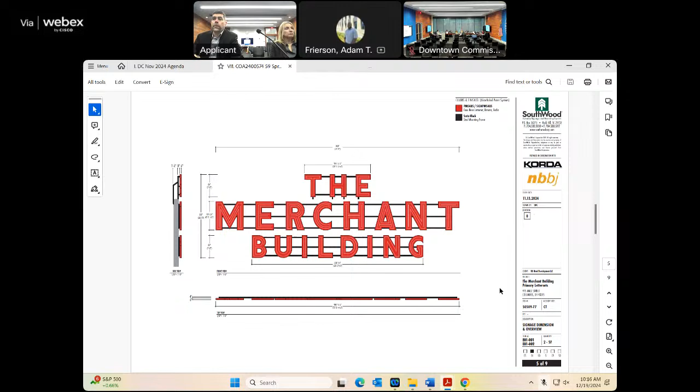It's a little different color. The frame on this is black. The metal panel that is behind it, covering the elevator overrun, is a darker gray. So they will have a little contrast off of one another, but not a lot. Good, yeah, actually not noticeable from the street level. That's right, that's right. But we do want that frame to show a little, but not be the prominent element. The sign is still the primary, so the structure becomes a secondary element to it.

Do you mount these at the edge of the building then? It is mounted about 6 inches off the face of the metal. How far up off the, it's on the parapet? It's on the elevator overrun. It does go above the elevator overrun, but that's the only portion that goes above.

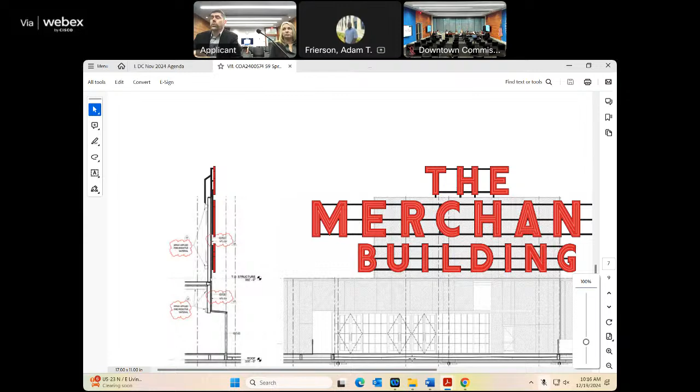Questions, comments? I appreciate the views put together, the level views, so we can see the perspective in relation to the other signs. Great. And we did receive, during the business meeting with HRC, very favorable feedback on the size and scale also, Bob, to your point. We have that meeting this afternoon because it's out of sequence. We typically would go to HRC first and then come to you, but given the timing of the meetings.

And I think procedurally what we're supposed to do is second those guys. Correct, behind those guys. Correct. What's everybody want to do here? Okay, there's a motion to approve. This is just a conceptual, so.

Is it conceptual? Yes, it is conceptual, but at the same time, without HRC, the question is is there a way that we can approve it? Subject to your approval with HRC. Yeah, we can't act otherwise.

I just had a question, just to clarify. In these drawings, we see that there are 3 metal pieces behind the sign, except for on the one side, is that accurate or? That is correct, yep. Just wanted to point that out.

Does everybody want to approve this subject to, obviously, HRC approval? Yeah, okay, so we would make that motion subject to HRC approval. And is there a second on that basis? Okay, if that's okay with you, does anybody from the audience have a comment? Okay, let's just do that. Then all those in favor, say aye. Aye.

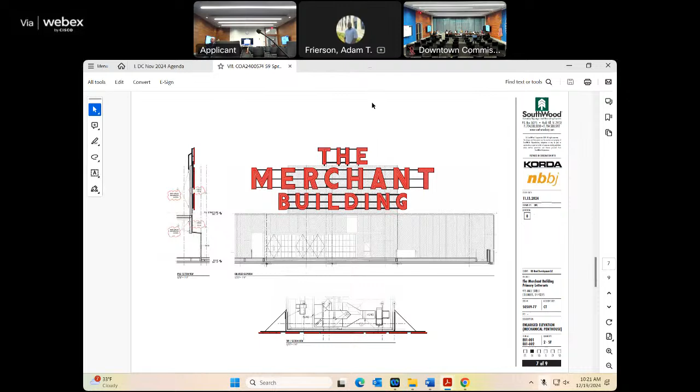Anything else for us today? Staff approved, yes, just a second. Okay, any questions or comments on the staff approvals? Is there a motion to approve? Motion to approve, thank you. Is there a second? Second. All those in favor, say aye. Aye, aye. Those opposed? Any other new business, old business, anything?

Yeah, I do. Okay, please. This has been a continuing theme, I think of in these other meetings. I don't know what we can do to improve the consistency of the applicants and what they're coming to the table with. This isn't an ordinary neighborhood area commission where we have inexperienced people or first timers. We have our most prominent architects, our most well-heeled developers and owners coming to this meeting, and there's inconsistency and lack of awareness as to what we're looking for or what we need in these meetings. The talent on this commission always brings the right questions out ultimately, but we could have a more efficient process if the presenters came with more information.